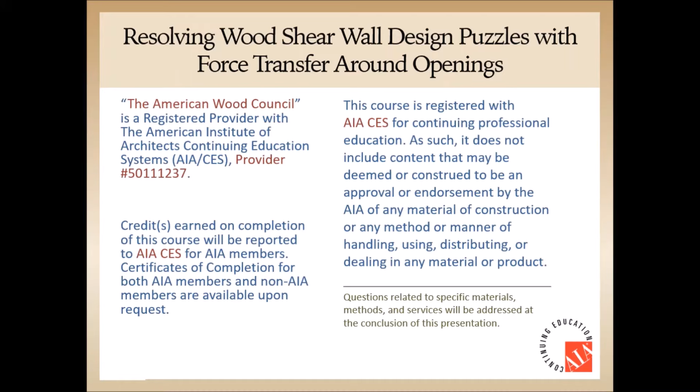To start with our learning objectives, first we'll look at the past and current methods for determining force transfer around openings using wood shear walls. Since force transfer around openings is accepted in code as the only method based on a rational analysis, there's a variety of methodologies available that engineers use regularly. Next, we'll look at the effects of different sizes of openings and full height piers, the different code allowable height to width ratios or aspect ratios.

And how that impacts all three currently accepted lateral design methodologies. We'll look a little more in depth into how the aforementioned testing allowed us to analyze the internal forces of the modeled shear walls and how that led to the accuracy comparisons between calculated and tested values for force transfer around opening methods. And lastly, we'll focus more so on the testing results that allowed for the creation of the new design methodologies and how they will allow us to accurately design for multiple openings and asymmetric piers as we move forward.

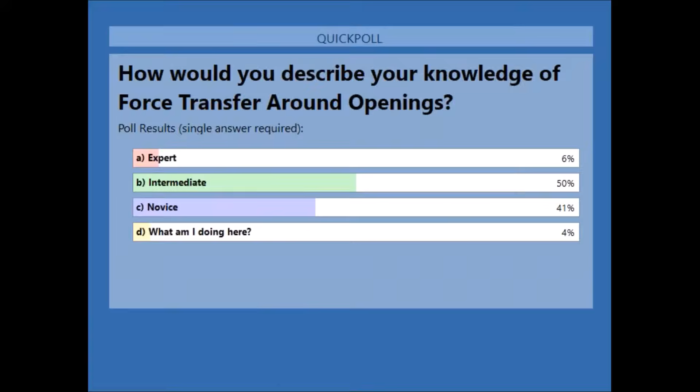So looking at this, here's our agenda for achieving the aforementioned learning objectives for the seminar. We're going to look at shear wall design challenges. We're going to look at the history of force transfer around openings research. We're going to look into the advancements in the force transfer around openings research, including asymmetric piers or piers of different widths, multiple openings in a wall line, C-shaped panels we will touch on, deflection calculations, and then the conceptual keys that came out of the testing that we did for FTAO. And lastly, some of the benefits that FTAO and continuously sheathed wood structural panels have for your shear wall systems.

So as structures are becoming more complex in the growing economy, designers are often searching for better options to accommodate the structural design.

One of the most challenging aspects of this design is the lateral resisting system. We're consistently seeing larger buildings, larger openings, which usually translate into reduced locations for lateral resistance, making it harder and harder to stay within the 2-to-1 aspect ratio of our shear walls.

What we'll examine here today is how FTAO will allow us to solve these puzzles by utilizing more of the accessible wall framing to aid in the resistance of these lateral loads.

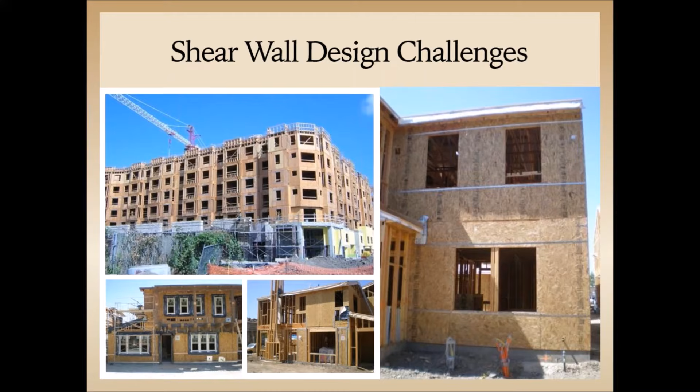But there are many ways in which force transfer can help us in the residential industry as well. Accommodating larger openings is shown in the bottom left, potentially replacing some of the pre-engineered systems by allowing for narrower segments, and allowing for openings that are not stacked floor to floor or that have some restrictions in other applications.

So before we focus on force transfer, let's look at our full spectrum of shear wall choices per the Special Design Provisions for Wind and Seismic, or SDPWS, which is part of AWC's National Design Specification. In SDPWS 4.3.5, it defines the different shear wall options.

You can do a segmented approach, a perforated approach, or force transfer around openings. We'll compare and contrast these to begin, especially for those of you who do not do wood design as regularly. So we'll begin with the segmented shear wall, as shown on the far left.

Your aspect ratio in the past was 2-to-1 for a seismic controlled design without a penalty, up to a 3.5-to-1 ratio with a reduction. Well, the code change for 2015 made it so that you have to apply this aspect ratio to buildings nationwide, regardless if it's high seismic or high wind. We will go into this in greater detail in our examples a bit later.

For the segmented wall, what you notice if you look closely at this picture is underneath these openings, we have open studs. So for this design, they most likely used a segmented approach, as they have the stacked wall systems with nothing going on in between the shear wall resisting.

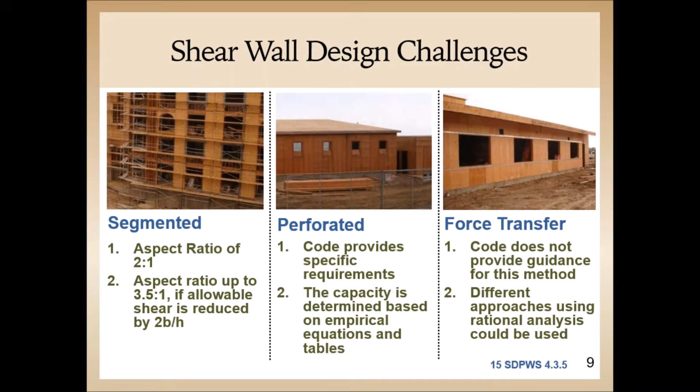So it's important to note that even though we are focusing on FTAO today, you don't have to pick one type of shear wall for your entire structure. You can mix and match story to story, wall line to wall line, whatever you need to do to get the best fit for your project.

So starting out, as I said, we'll do a little review. As shown before in the comparison, for the segmented approach, you only use the full height segments. So only these full height segments can apply to the effective lateral resistance. The aspect ratios are typically height to width ratios using only these full height segments.

Typically with a segmented approach, we also have to place hold downs at each side of every wall pier in order to resist our tension and compression forces.

Another item to note is that the aspect ratio adjustment has changed. The requirement for the adjustment penalty used to only apply to high seismic areas. Now, in the 2015 SDPWS, if you exceed a 2-to-1 aspect ratio, an adjustment is applied globally for all shear walls, regardless of seismic or wind. It no longer matters if you're designing in LA or Boise, Idaho. If you exceed that 2-to-1 aspect ratio, your shear wall has to have an adjustment factor, and you can go up to a 3.5-to-1 adjustment maximum. The adjustment factor now also has options, which we'll cover later.

So going to the perforated approach, we're looking at this as a single shear wall, so you only have 2 hold downs now at the outside of the shear wall. Your Vmax, shown at the bottom of the wall, is calculated based on the unit shear, based on the sum of the full height sections. We're still looking at the full height sections of the wall for our aspect ratios, so that's another challenge with the perforated shear wall. It's measured the same as the segmented approach. Your height is based on the total height of the wall, and in this case only the full height segment widths adjacent to the openings count for your height to width ratios.

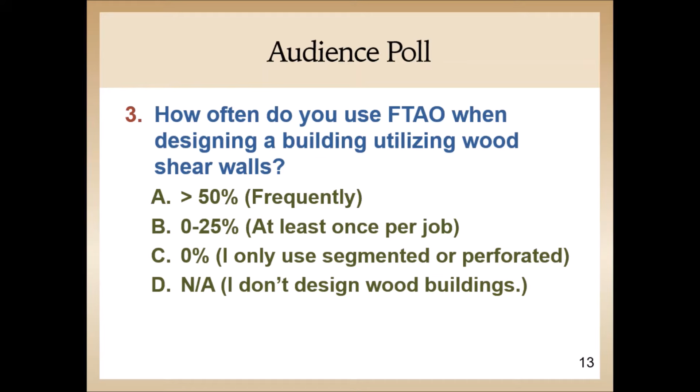All right, so how often do you use force transfer around openings when designing a building utilizing wood shear walls? Is that more than 50%, frequently; 0 to 25%, at least once per job; or 0%, you only use segmented or perforated, or you don't design wood buildings.

Again, 75% of you have voted in the first 20 seconds. You all are very fast. All right, I'm going to go ahead and close it.

Let's see. So 41% do not use force transfer around openings, they only use segmented or perforated. 26% don't design wood buildings. 22% use it 0 to 25% or at least once per job, and 11% use it more than 50% or frequently. All right, Jared, back to you.

Okay. So here we want to look at the aspect ratio adjustment factor changes that I noted before, and the deflection requirement changes for the new 2015 SDPWS.

As I noted, instead of applying that adjustment factor only for high seismic structures, now all shear walls with an aspect ratio greater than 2 to 1 but less than 3.5 to 1 shall apply a reduction factor. The old reduction factor was 2 times the actual width divided by the height. In section 4.3.4, there's a new aspect ratio factor equal to 1.25 minus 0.125 times the height divided by the width. So for the old factor, where aspect ratio was 3.5, the adjustment factor was 2 divided by 3.5, which equaled about 0.57, versus the new 1.25 minus 0.125 times 3.5, which gets us about 0.81. So we're looking at about half the penalty with the new aspect ratio adjustment.

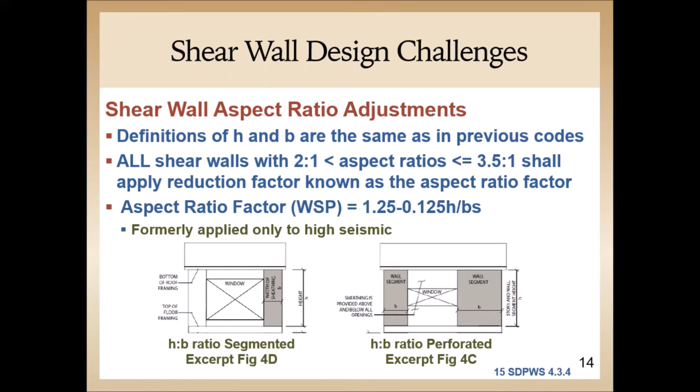The difference is, with the new aspect ratio adjustment, you also have to make sure that all of the shear walls in that line have identical deflection.

So you may or may not be aware of this in SDPWS section 4.3.3.4.1, which states that individual shear walls in a line shall provide the same calculated deflection. So that's what I was talking about.

Each design utilizing the new aspect ratio adjustment factor shown in 4.3.4 must also conform to this provision. This creates an additional step to using the less restrictive adjustment, as we now have to ensure that each wall segment used to resist shear loads in the same wall line has the same calculated deflection.

So as a note, you do not have to perform this check if you have shear walls using the historic adjustment factor, or shear walls that do not exceed that 2 to 1 aspect ratio.

So another clarification for the new 2015 SDPWS that's useful to note is with the perforated approach. In the past, the question would come up: if some of my walls meet the 2 to 1 aspect ratio in my perforated shear wall, but not all of them, do I need to apply the adjustment factor to the entire wall, or do I just apply that adjustment factor only to the full height segments?

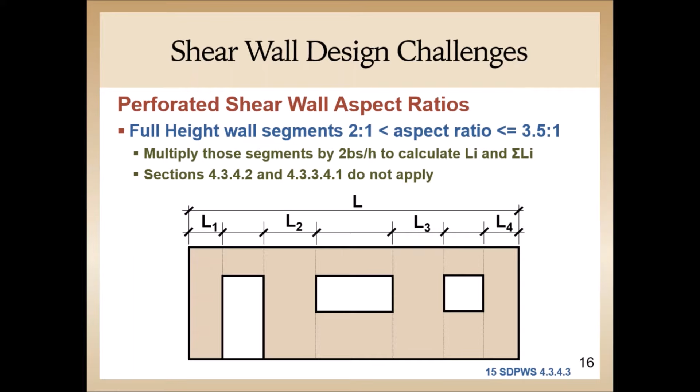And it's less of a penalty than in the past, but also you have to make sure, if you use the new aspect ratio adjustment factor, that all four of these shear walls have the same deflection across the wall line.

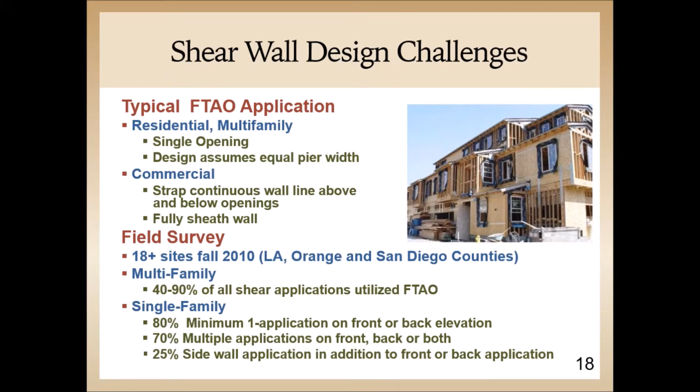They're typically in the front or the back of the house, right? So this makes sense as to why we saw the need for force transfer around openings that was going to be used on narrow segments with taller heights, and also ratios based on the number of openings, which drive us to the requirements for our FTAO.

So the joint research project was done with APA as well as the University of British Columbia and the USDA Forest Products Lab. The University of British Columbia provided a finite element analysis component to the project. They replicated the same testing that we did physically in our laboratory with a computer model to show the same results. The Forest Products Lab provided oversight and a managerial aspect.

The goal was to look at the variations in walls with different code allowable height to width ratios, the 2-to-1 versus the 3.5-to-1, different sizes of openings, different levels of detailing, and different wall panel widths.

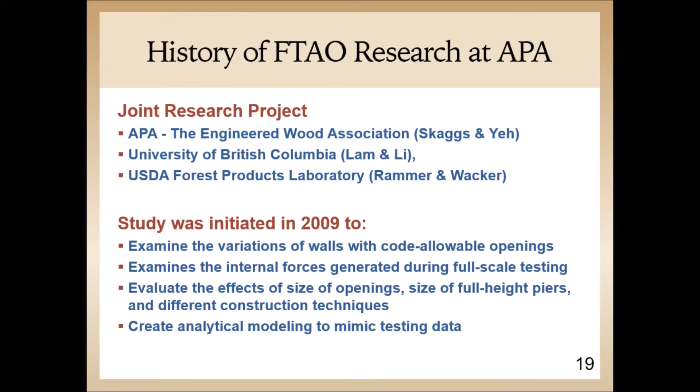Did they only sheathe the full height segments using a segmented approach, or did they sheathe the entire wall and not have the full hardware as a perforated wall versus full force transfer around openings with strapping and blocking above and below? We wanted to look at and compare all of the current design methodologies.

In addition to recognizing what was done in the field, we wanted to compare that to the rational analysis techniques typically used by structural engineers, to identify the most accurate rational analysis method. We wanted to see which current force transfer around opening techniques would calculate strap forces closest to those measured in the laboratory testing.

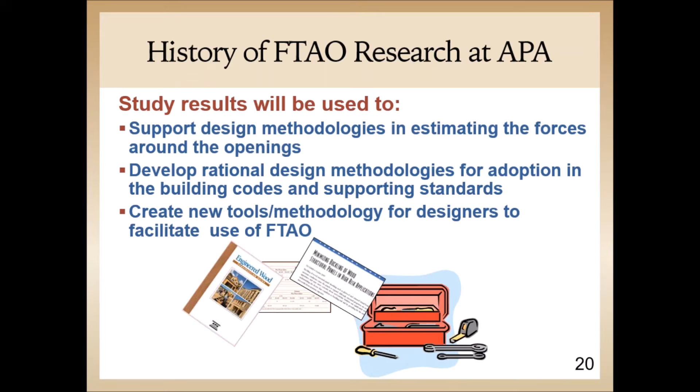Anytime APA does research or brings something into the laboratory, our goal is to make things better for the construction industry. We want to help engineers create accurate designs faster, help contractors build more efficiently, and make the entire process more efficient for all parties involved.

So to start off, we wanted to look at all the different techniques currently available for force transfer around openings. When we talked to designers and went out into the field, we identified the top three most common force transfer around opening techniques currently being used.

For the cantilever beam analogy, you take the same wall, but now we break the wall into segments and sum our moments to solve for the forces at the corners.

Thinking about the moment we calculate based on the geometry, and applying this to a typical wall: where do we tend to have more sheathing, above our opening or below it? Typically we have more sheathing below the opening. So when calculating moments and summing for corner forces, we tend to calculate a greater force above our openings, where we have less of a resisting arm.

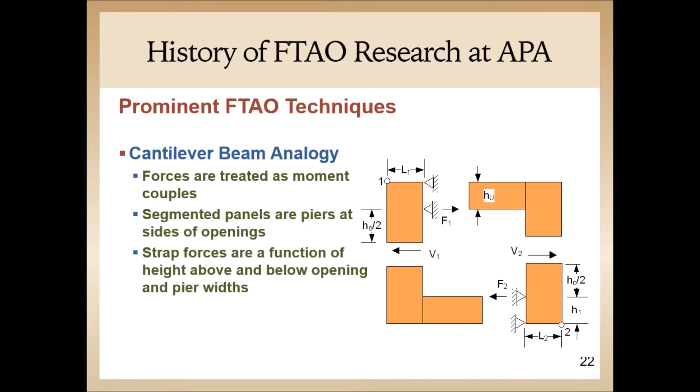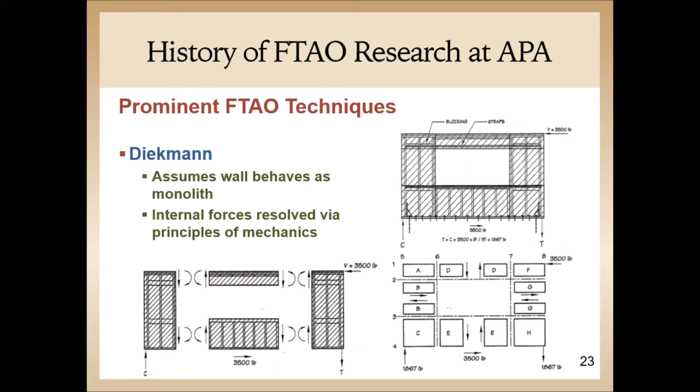The most common technique is the Diekmann technique. This solves for the internal forces of the wall using principles of mechanics. We break the wall into smaller individual segments, and using simple statics, solve for the forces in each segment. Once resolved, we put all the pieces back together to calculate the overall forces on the wall system. Some of you may also be familiar with the Thompson or SEAOC method, which is similar but yields slightly different results.

That brings us to our next audience poll question: in which force transfer around opening method are the forces determined by calculating moment couples? Is it the drag strut analogy, cantilever beam analogy, Diekmann-Thompson, or the unicorn method?

I think the questions are getting a little harder. People are going a little slower. Maybe we're getting tired—it's that time of afternoon.

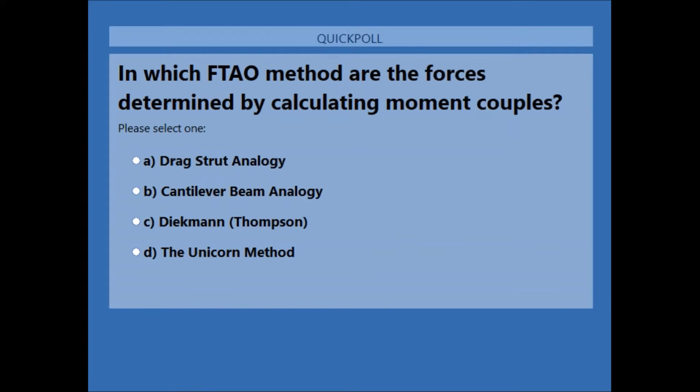I've got about 35 seconds left, and we're at 80% response. So we've got 58% saying the cantilever beam analogy, 27% the Diekmann-Thompson, 14% drag strut analogy, and 1% the unicorn method. All right, Jared, what's the real answer?

The correct answer is B, the cantilever beam analogy method. This is the one where we resolve the forces by moments and see how that equates into the strap forces above and below the openings.

Moving forward, let's apply this to a simple wall example to see the resulting forces between the three methods—we'll get into a full example shortly. For this wall we have a 2,000 pound shear force at the top, a 2'3" width for the first wall pier, a 4-foot opening, and a 4-foot end wall pier, giving us asymmetric wall piers, with 2 feet of sheathing top and bottom. This is asymmetric wall piers with unrealistically the same height of sheathing above and below the opening, but just for quick reference purposes.

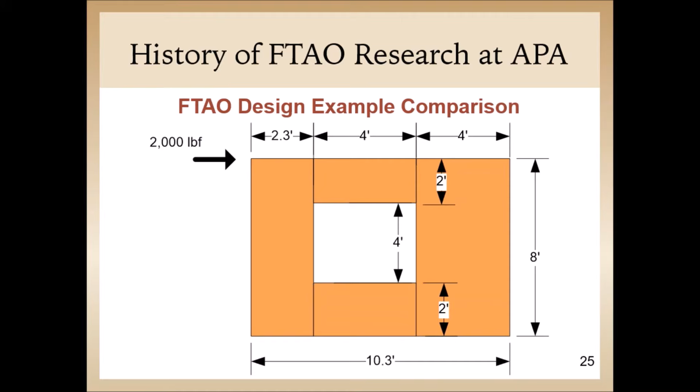So overall length of the wall is going to be 10 foot 3 inches, and the wall height is 8 feet. So running the analysis for all three of the FTAO methods on my program TI-89 to evaluate the corner forces at the openings.

We find that the drag strut analogy yields forces of 284 to 493 pounds. The cantilever beam analogy resulted in 1,460 to 2,540 pounds. And the Diekmann method, 567 to 986 pounds.

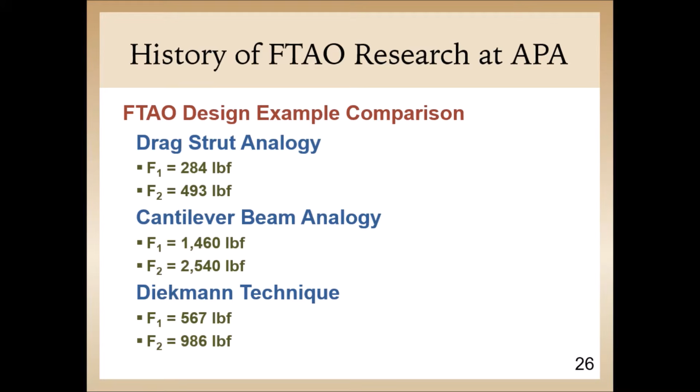So looking at the numbers, we see quite a bit of spread between the results, which could also alter the strap selection for the wall. So the questions are: are they all correct? Are they all incorrect? Which method should we be using? And those are the questions that we set out to answer with our testing.

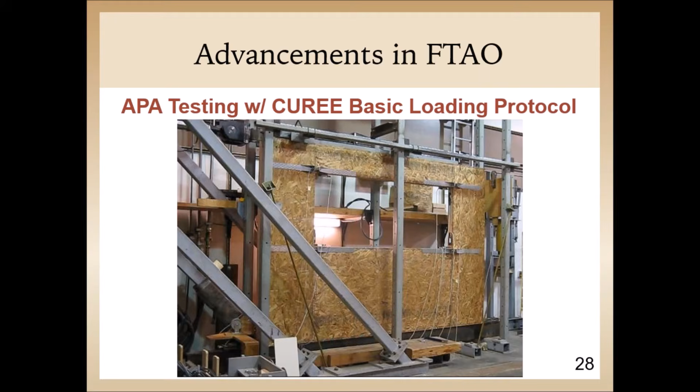The flat straps are going to be used in the field, and these hold downs were specifically used for the ease of replication in the testing and monitoring, and it also allowed us to attach more monitors to the hold downs than we could with a flat strap. We did additional testing, which I can show you in a little bit, with a wall that has the flat straps to prove that we were going to achieve the same results and that the hold downs did not alter our methods. So I wanted to point this out before getting too far along so everybody wasn't thinking we were crazy and going for something completely different. But if you decide to use those hold downs in the future, it is tested and completely approved, so that's up to you.

So all the walls were built 12 feet long, 8 feet tall, and we had 12 different wall configurations that were tested, some with force transfer around openings and some without. The wall nailing was 10D common nails at 2 inches on center for all of the walls, and we used 15/32 performance category Structural 1 OSB.

You may also be asking yourselves, why did we select these particular materials consistently? The reason why, if you're familiar with the history of the perforated wall tested in Japan that we spoke about earlier, you'll recall there was a limitation to the maximum shear you used to be able to use in the past, based on the testing they did for perforated shear walls—they had only tested it to that level of shear capacity. So we didn't want our research to be limited based on selecting a lower level of OSB, nailing, or whatever component. So we took it to the top of the chart, using the Structural 1, 15/32 OSB, and the 10D nailing. We also chose OSB versus plywood because there are some people in the industry who believe plywood is a superior product to OSB.

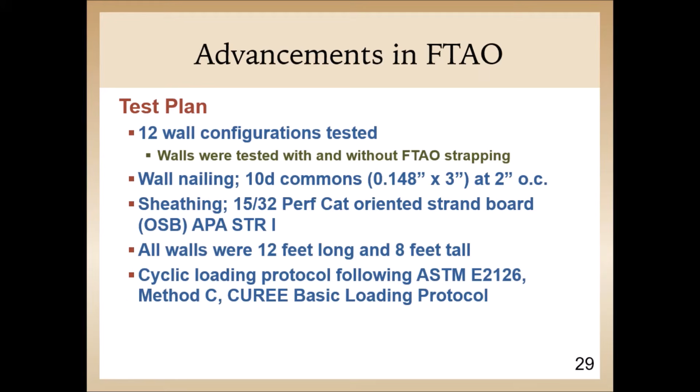All of the walls were tested using a cyclical loading pattern and the CUREE basic loading protocol. As I go through our wall configurations, I'd like to highlight just a few of these. I'll touch on all of them, but if you're interested in reviewing any configuration in more detail, the full research report is available on our website.

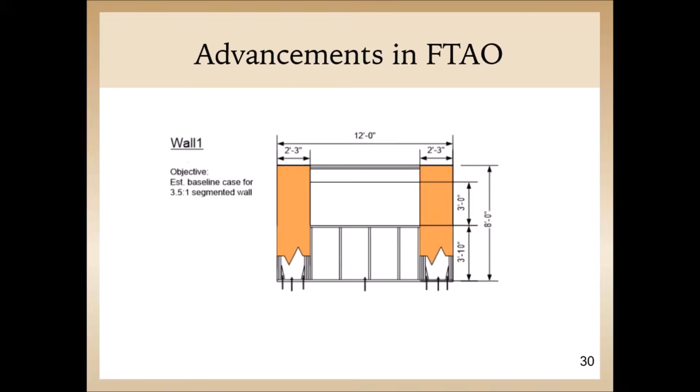Beginning on wall 1, we were looking at the segmented approach. You see we have our 3.5 to 1 aspect ratio for our wall, so we end up with 2'3" pier lengths on either side. There was no sheathing above or below the openings—sheathing only for the full height segments, with hold downs at either end.

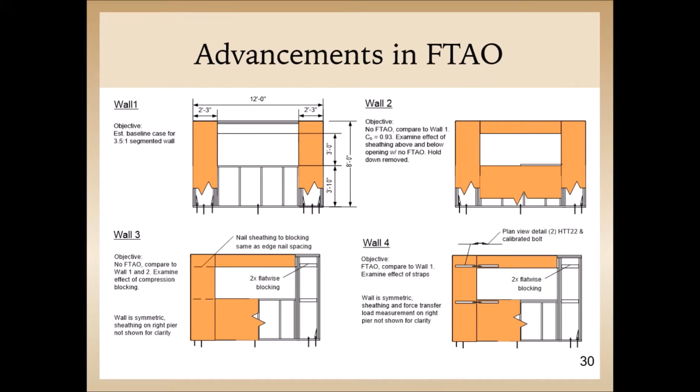Wall 2: we added sheathing above and below the opening and removed the interior hold downs, enacting the perforated method. Wall 3 is the same as wall 2 with the addition of blocking at the interior side.

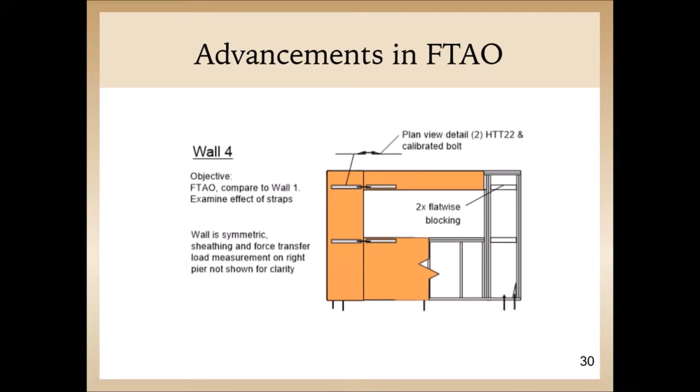If we look at wall 4, we're building up to that full force transfer around opening detailing. It's the same geometry as walls 1 through 3, but now in addition to the sheathing above and below the openings, we have strapping at the exterior of the wall and nailing as appropriate.

Now if we move on to walls 5 through 8: for wall 5, we've taken wall 4 and increased the size of the opening.

We'll blow up wall 6. It's also similar to wall 4, but if you look closely you'll notice the C-shaped panel at the left side of this diagram. Typical wood structural panels are usually 4 feet by either 8 or 10 feet long on a job site, so for this wall we had the 2'3" piers at either end. Part of what we saw a lot of in the field study was the fact that these openings were being cut out of the panels in place, creating these C-shaped areas of sheathing. Seeing this, we wanted to see how, or if, this would react during testing—whether having that C-shaped panel contributed to the force transfer around openings and if the panel helped transfer the load. I'm not going to spoil the results now; we'll go over this in a bit.

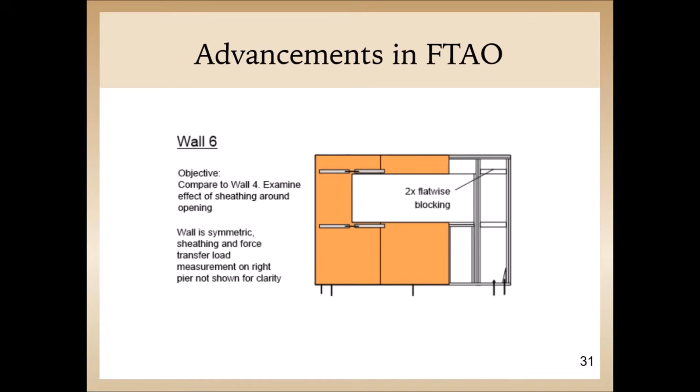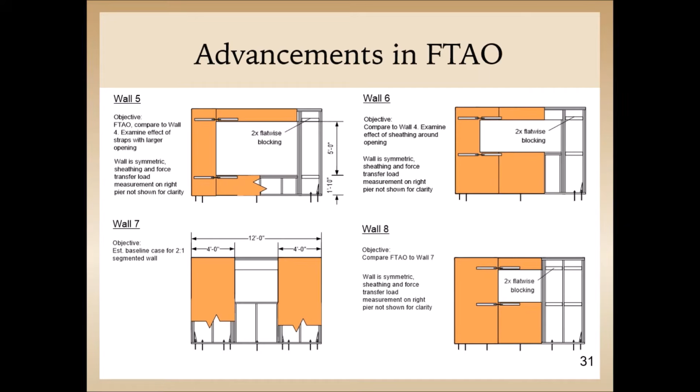Looking at walls 7 and 8: wall 7 is similar to wall 1, but we are getting our basis for the 2 to 1 aspect ratio in lieu of the 3.5 to 1 aspect ratio. Wall 8 is wall 7 with full force transfer around openings detailing.

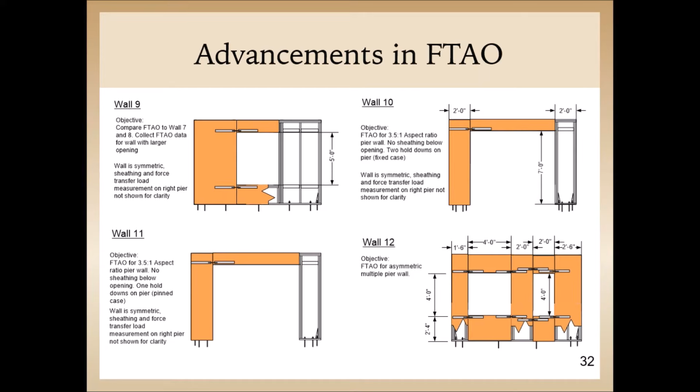Looking quickly at walls 9 through 11: wall 9 is basically the same as walls 7 and 8 that I just showed you, but we have enlarged the opening once again to analyze the effects on the strapping. Wall 10, we wanted to analyze a larger door opening using FTAO. Wall 11 is the same as wall 10, but if you notice at the bottom, we've removed the interior hold downs from each pier.

So again, we'll blow up wall 12. This is our last segment configuration, and it provided us with some of our greatest information as far as going around multiple openings and asymmetric piers. You'll notice we have different pier lengths for each of the full height segments. We have the full force transfer around openings detailing, one hold down at each end of the shear wall, strapping above and below the opening, and—though you can't see it—there's blocking on the reverse side of the strapping at the interior side of the wall.

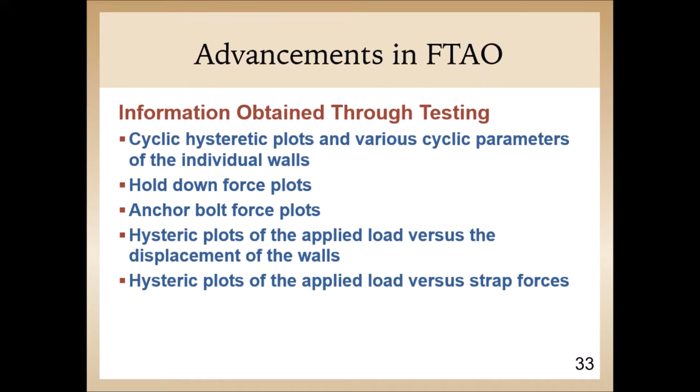So through all of this, what information was obtained? We monitored different aspects of the building, from anchor bolt forces to hold down forces to strap forces, and wanted to collect all this information. We evaluated the displacement of the elements versus the load applied and provided hysteretic plots for all of this information—we'll see some of this in a bit. We used a reference deformation of 2.4 inches, allowing a maximum of 4.8 inches on the wall system as a whole. This reference was simply based on some of our historic testing and conclusions we've drawn from shear wall testing throughout the years.

So the strap forces were measured during testing to gain a comparison between the common FTAO techniques being used today. As we discussed earlier, we have the drag strut technique, the cantilever beam technique, Dieckmann technique, and the SEAOC-Thompson technique at the end. So we used the test to compare the measured strap forces versus the forces estimated using all these different calculation techniques.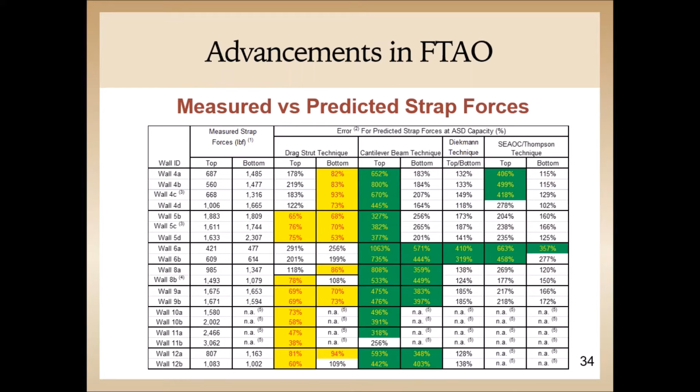All the other techniques were considered way overestimated on that wall. So the C-shaped panel really does provide us some design assistance and something to consider moving forward if you plan to use the drag strut technique. You can incorporate the C-shaped panel into your detailing to help offset some of the unconservative nature of the design. We currently don't have anything in place to help with that design right now, but using the rational analysis, you can help use that to move forward.

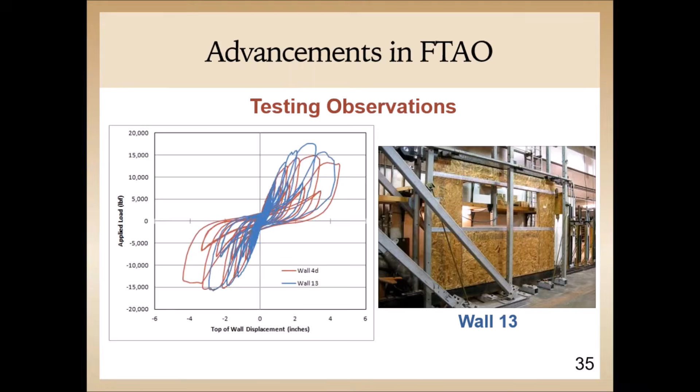As mentioned before, here's a photo showing the flat strapping that was also done in the lab. This is wall 13. The only purpose of this wall was to prove that we were going to get the same relative forces as we were with the hold downs used on some of the other wall systems. The strapping we used in the lab were 2 traditional hold downs mounted seat to seat on the other walls, so here we did that for the strapping and flat straps all the way across the wall system. On the left-hand side, you can see one of the hysteretic plots that was produced from applying that lateral load to the system and regulating that through the computer-generated graphics.

So our conclusions, looking at these 12 wall configurations and the different levels of detailing we used, we did find that the walls detailed with full force transfer around opening resulted in a better global response. The stiffness of the wall increased, as well as the strength of the walls, on all of the force transfer around opening configurations in comparison to all of the other approaches. So that's why we want to focus around force transfer around openings.

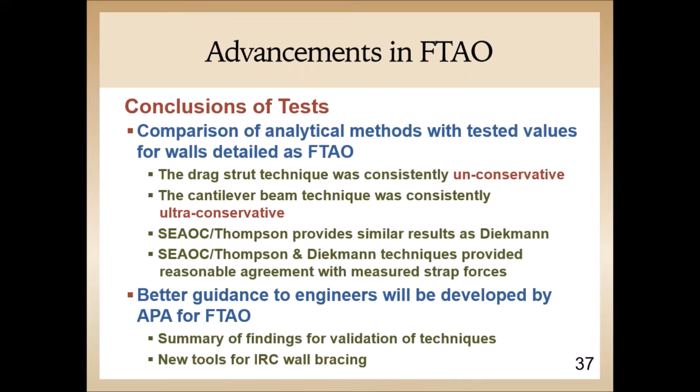When looking at your rational analysis methods, however, we also recognize that the drag strut technique was consistently unconservative. The cantilever beam was typically ultra conservative, which left us to decide whether to use the SEAOC or the Dieckmann method as part of our design focus. These two were the most economical design choices. So getting through that, that leads us to our 6th audience poll.

And much like the other one, same format, a little different question. Which force transfer around openings method tested was found to be consistently unconservative? Is that the drag strut analogy, cantilever beam analogy, Dieckmann-Thompson, or the unicorn method?

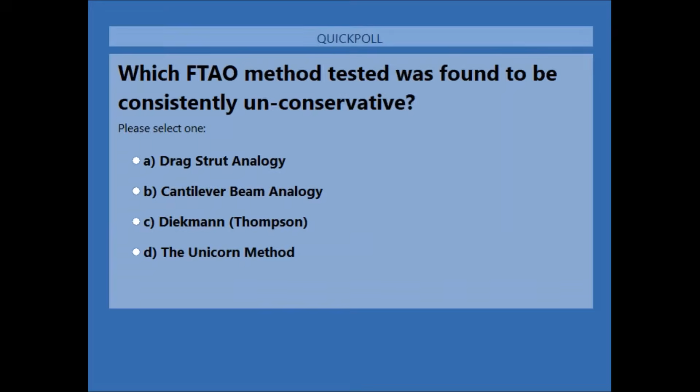I think people were probably listening. So we've got 78%, 79, 80, and I'm going to close it. We've got 87% saying the drag strut analogy, 6% cantilever, 5% Dieckmann-Thompson, and 2% unicorn.

It's always good to have fun. Okay, Jared, there we go.

Correct answer is A, the drag strut analogy. Hopefully this is a bit of a softball - that was the consistently unconservative version.

So what's next? What else can we do to move forward with FTAO? Most of our feedback from engineers time and time again was on something similar to the wall 12 configuration - multiple openings and asymmetrical piers.

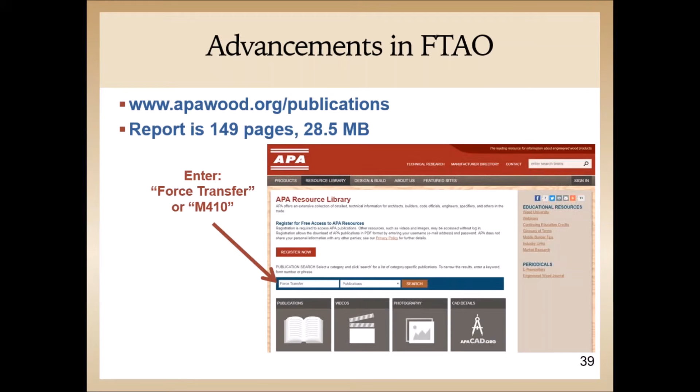Before I move to our advancements, a note: if you're wanting more information, the research report is available on our website at apawood.org under the resource library. Simply search for force transfer or the form number M410, and you can download our research and this documentation for free. This also brings me to the SEAOC paper shown here.

In 2015, Tom Skaggs, one of our research engineers in Tacoma, Washington, and Karyn Beebe, another field service representative similar to myself, wrote a paper for the Structural Engineers Association of California convention titled Advancements in Force Transfer Around Openings for Wood Frame Shear Walls.

This really focuses on the configuration of wall 12 that I just showed you all - multiple openings and asymmetric piers. It is also the basis of our upcoming document that we're trying to put out.

It's currently in development today along with a spreadsheet, and the report is on schedule to be released hopefully by the end of this year. It will be accompanied by that Excel spreadsheet that hopefully will help make this an easier transition in using force transfer around openings. Both of these were developed along with our testing that was done in the laboratory.

So here are a couple snapshots from the Wood Design Focus articles that I mentioned before with Zeno Martin. This really shed light on the different analysis techniques, giving very different answers. Also, as mentioned, Ed Diekmann wrote back to Zeno in his original article with his own rational analysis approach.

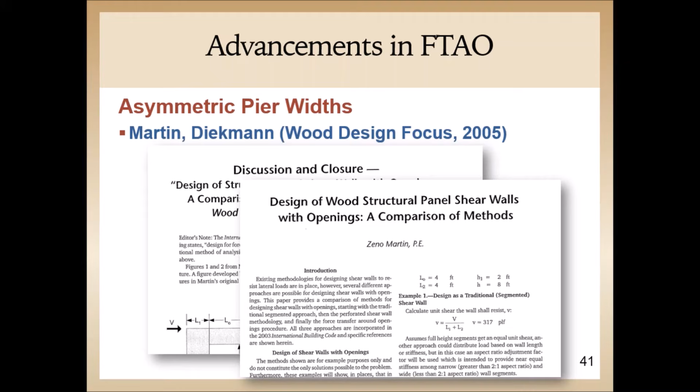Mr. Diekmann was also very kind when we did our first phase of testing, as shown in the laboratory. He provided us with design results for this same wall number 12 so that we were able to use his actual calculations in our comparisons.

So now that we're at wall 12, looking closer at this wall system, this is the full force transfer around openings detailing. We have sheathing above and below all of the openings. You only have a hold down at the beginning and at the end of the wall, and strapping is provided above and below the openings.

Again, you cannot see it, but blocking is provided on the interior side of the wall. We have multiple openings, 2 windows here, asymmetric piers, different pier widths for the entire wall line. So how do we provide an accurate analysis for this? That's what we wanted to set out to prove.

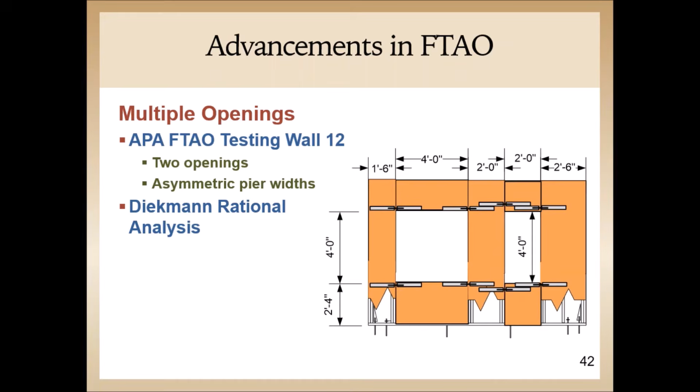So comparing the Diekmann technique to the SEAOC technique, there's some different basic assumptions. We're focusing on the Diekmann technique for this presentation - that's also what we focused on for our conceptual keys and what came up out of the testing for FTAO. Not to say you can't use another technique, but using this method matched the testing most accurately in all of the forces.

So the first assumption in our conceptual keys is that the unit shear above and below the opening is equivalent. The second is that the corner forces are based on the shear above and below the openings and only the piers adjacent to that unique opening.

So in the previous slide, we had 2 openings, and when you're looking at this distribution of forces, you're going to break it down into each opening one at a time before you put it all back together. The tributary length of the opening needs to be calculated to define how much shear goes into each pier.

So in the Diekmann technique, you're not going to have the same shear horizontally for your full height segments. That's going to vary - it's going to be the same top and bottom, but not the same horizontally. So you need to identify the tributary length that applies over that opening to each of your full height pier segments, based on the geometry of the panel lengths next to each unique opening.

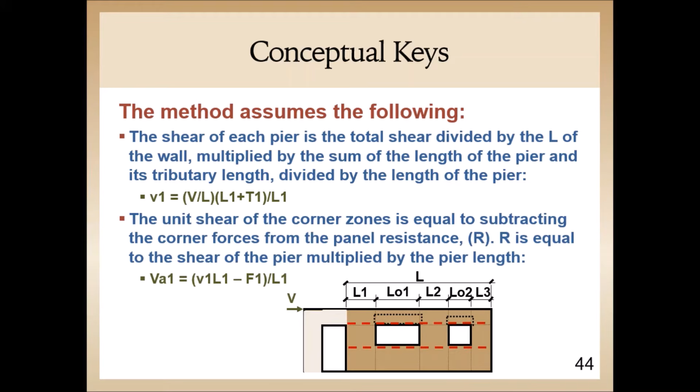So the next step is that you have to be able to calculate the shear in all segments of the wall. We have those corner zones that have to be calculated, based on the resistance minus the strap forces, and then we divide that again by the length of the pier.

So we'll go through a design example so we can see this in a little bit more detail here in a bit. As I mentioned earlier, the best part is the final conceptual key. The final key is that when you're done summing all of the shears for the segments, you can check your work.

The first vertical line and the last vertical line, shown here as lines 1 and 6, should sum to equal the hold down forces. All of the vertical lines in between should sum to zero. This lets you know if you've done your math correctly, and you can check all of this at the end of the calculation.

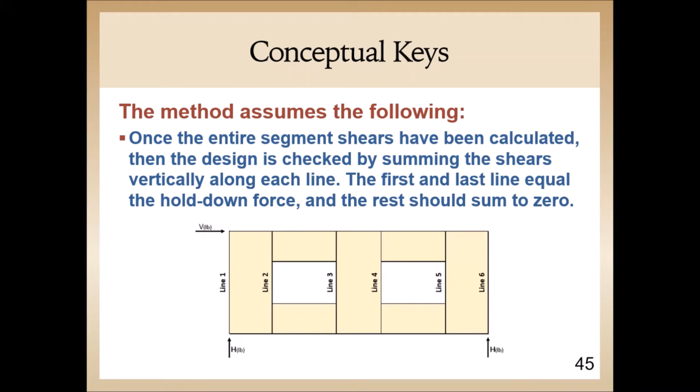This is a lot of keys, and I know I've gone through them a little quickly, so we'll go through an example here in a bit to reinforce it and kind of show you what I'm discussing.

So this brings us actually to our next audience poll before we get into our design example.

Okay, so which lateral design method do you believe is the most economical? Segmented, perforated, FTAO or force transfer around opening, or duct tape? I'm pretty sure it's duct tape. Yep.

All right, we've almost got 80%. And here we go.

All right, so we've got 71% say force transfer around openings, 18% say perforated, 8% segmented, and 3% are with me around duct tape. Nice.

So, and all right. What do you say, Jared? What is it? That one, there's no right, no wrong answer, right? So it's what you perceive and how you feel in your design.

So what we're looking to prove, obviously, with our presentation and our testing is that force transfer is hopefully going to be the most economical choice. So as we get into this, we can look at that in a little bit more detail.

As most of us are engineers, building officials, and so on, some of this is going to be a review. But as I stated in the testing, we wanted to make sure that we looked at identical wall patterns and all of the methods that are currently available to us to see which one was the most economical, which one was the most accurate, and which one helped with our designs.

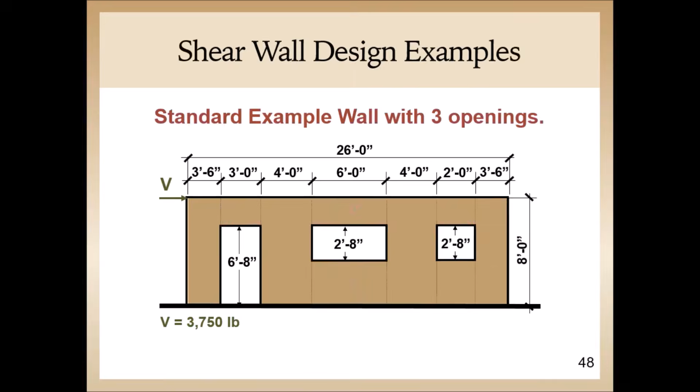So we have 2 4-foot piers at the interior walls and 2 3'6" piers, one at each end of the wall. We're going to be applying a 3,750 pound seismic shear load to this wall system.

So beginning with the segmented approach, we ignore the contribution of the sheathing above and below the windows, correct?

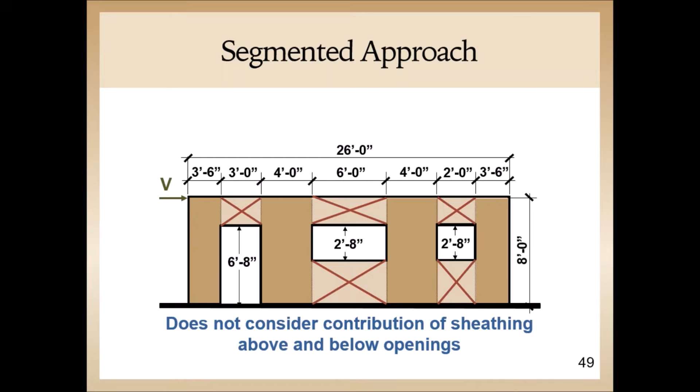First, we'll look at the height to width ratios of the segments. We recognize that we have the 4-foot wall segments that meet our 2-to-1 aspect ratio, and the 3 foot 6 inch ones do not. They have to take that adjustment factor.

What we're showing here is the historic adjustment factor: 2 times the width of the pier divided by the height. For our 3 foot 6 inch segments, we would have to adjust only these segments by that 0.875 shown at the bottom right-hand corner. This is an option - you could use the new adjustment factor we spoke about previously, but then you would also have to perform that additional step of calculating the deflections of each pier to verify that it is the same for all piers. So for simplicity, for this example and presentation, we're only going to show the historic adjustment factor.

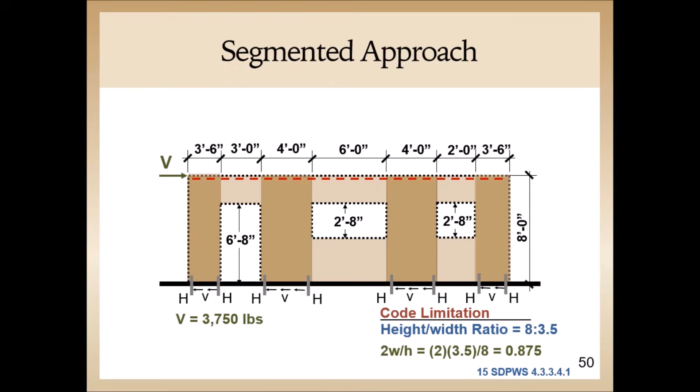So first, we start by calculating our unit shear. This is the 3,750 pound shear load divided by the sum of the length of the full height pier segments. So we add 15 feet total, which gives us 250 pounds per linear foot along the wall.

Now we look at the allowable shear for our segments based on the sheathing values. If we look at the narrower 3 foot 6 inch shear walls, we're using 15/32 rated sheathing, 8 penny common nails, 4 inches on center, and we have to apply that 0.875 adjustment factor to the 380 PLF, which brings us to 332 PLF. These values are out of the SDPWS table 4.3a, nominal unit shear capacities for wood frame shear walls.

As I spoke about earlier, we're using a seismic load, so if you want to double check some of these numbers, you can feel free to do so. This will yield that 332 PLF, which exceeds our 250 PLF design value, so we're good there.

So now we're looking at the 4 foot wide walls. We're using the same thickness of sheathing, the same nail size, but the nailing can be reduced to 6 inches on center instead of 4 inches on center. Getting the shear value from our table, we show that our allowable shear exceeds the design shear, so we're good.

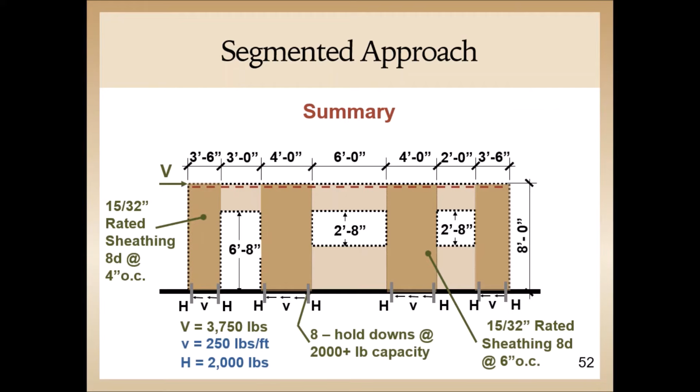So quickly, we'll look at the summary for the segmented approach, and we'll review this again in a bit when we compare all 3. We're going to have 15/32 rated sheathing with 8d nails at 4 inches on center at the outside 3 foot 6 inch walls, 15/32 rated sheathing with 8d nails at 6 inches on center at the interior walls, and we're showing 8 hold downs with a 2,000 pound plus capacity. And then our attachment at the base of the wall has to also equal the 250 pounds per foot, right?

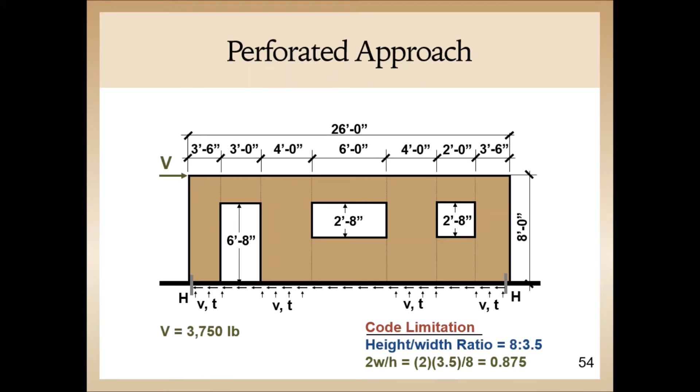So now let's look at that same exact wall using the perforated shear wall method. Looking at our aspect ratios, we have the exact same values as we did with our segmented approach. The 4 foot walls meet our 2-to-1 ratio, but our 3 foot 6 inch walls must still be adjusted, right? So we have that same factor at that wall.

We'll start out again by calculating our unit shear. This is the 3,750 pound shear load divided by the sum of the length of the full height pier segments. Again, same wall, so 15 feet total, which gives us that 250 pounds per linear foot.

Now we need to take a look at the percentage of the length of the full height sheathing versus the entire length of the wall. Taking our 15 feet, dividing that by the 26 feet, we come up with a value of around 57%. Now we get our maximum opening height, which no brainer is our door, correct? So 6 foot 8 inches tall.

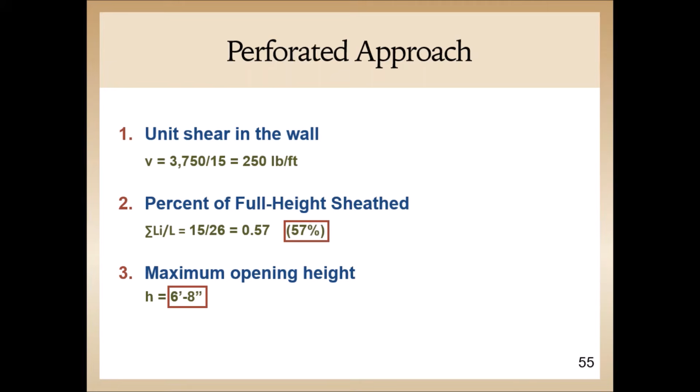And this is where we go in and we find our shear capacity adjustment factor, or that Co factor, that we need to use to adjust the value of the shear. So taking into account a percent of full-height sheathing and maximum opening height, we take that 57% that we just calculated, find our 6 foot 8 on the top, and interpolating between the values we end up getting that 0.61.

Also, if you're still not completely sure about your opening height and want some flexibility, you can look at the top of the chart here and see that the opening heights are also given in a ratio, so you can find out what your wall is capable of and design your opening heights based on that, without having to know your design heights going into the chart. So we come up with this capacity factor of the 0.61.

So now that we have our CO factor from the table, we use that to adjust the allowable shear value of our sheathing. Going back to the SDPWS table 4.3a and looking at the 15/32 sheathing with 8D penny nails, we have to go to a 3-inch on center nail spacing in order to achieve our design value.

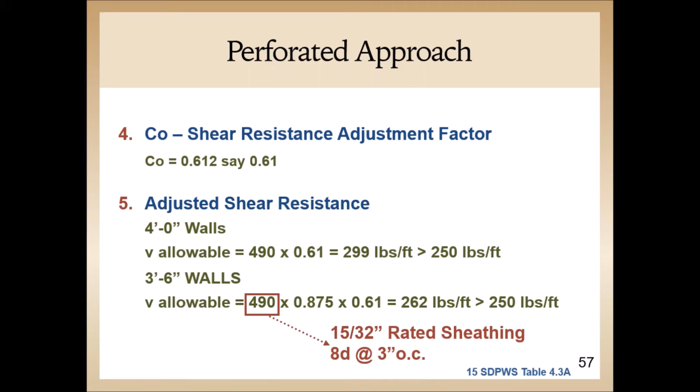So we took the 490 PLF allowable shear, multiplied that by the shear resistance adjustment for the 4-foot walls, and by both the aspect ratio adjustment factor and the shear resistance adjustment factor for the 3-foot 6-inch walls. For the 4-foot walls, we end up with 299 pounds per foot, which is greater than 250. For the 3-foot 6-inch walls, we actually have to go down to 262, which is still greater than 250. So we're good at 15/32 rated sheathing with 8D nails, 3 inches on center.

So stay with me, we're almost there. This perforated approach does take a little while.

Now that we have our sheathing determined, we can move on to calculating the uplift at the ends of the perforated shear wall, which is equal to our hold down force, R. This is defined as the unit shear multiplied by the wall height, so 250 times 8, divided by the shear resistance adjustment factor of 0.61. This gives us roughly 3,280 pounds.

Next, we calculate the in-plane shear anchorage, or Vmax, which needs our unit shear of 250 PLF divided by the shear resistance adjustment factor. This gives us roughly 410 pounds per linear foot, which is the value used to design our collectors, or drag struts, between full height wall segments at the top of the wall system.

Next, we have to take into account the uniform uplift anchorage value that will be used to design the minimum wall base plate attachment to the foundation. This is only used at full height wall segments and is equal to the in-plane shear force at the top of the wall, so that 410 PLF.

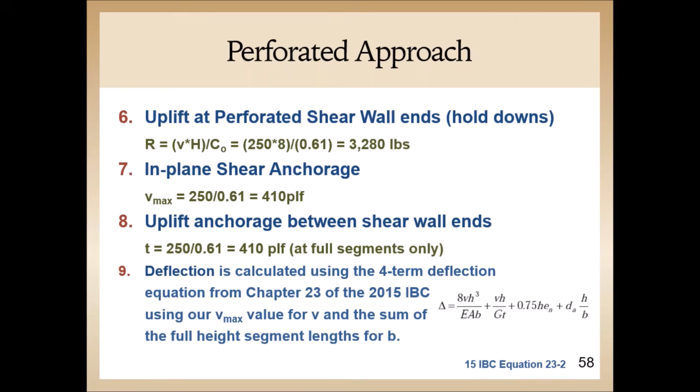Finally, looking at the deflection, we input our calculated Vmax and sum of length values into equation 23-2 of the 2015 IBC. For simplicity, I'm not going to go through the full deflection equations here, but we can definitely get that to you if you want it for the example after the presentation.

So looking at a quick summary, our aspect ratios have the exact same values as we did for the segmented approach. The 4-foot wall met the 2-to-1 ratio, so it did not have to be adjusted. The 3-foot 6 walls did have to be adjusted, but either way we came up with the same nailing throughout: 15/32 rated sheathing with 8D nails at 3 inches on center.

We only have 2 hold downs instead of the 8 on this one, so we have 3,280 pound hold downs. Our attachment at the base of the wall also has to be done for the 410 pounds per linear foot, which is higher than the 250 pounds per foot we had earlier.

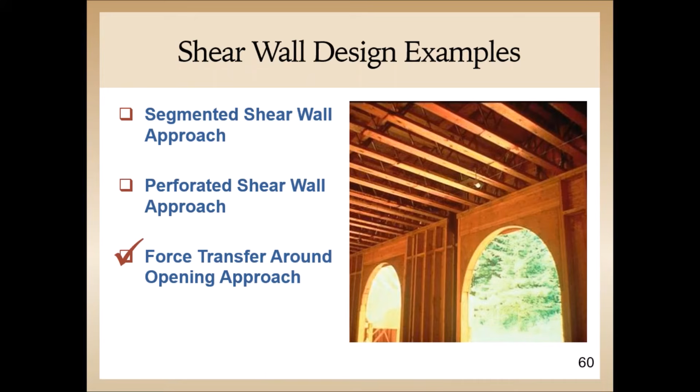Okay, we're there, we made it. Let's finally look at force transfer around openings.

So if we take the same wall geometry and apply the force transfer approach, we're going to begin our wall beyond the doorway. The reason for this is that first conceptual key, right? We're assuming an equal distribution of shear above and below our openings. So with the doorway, we cannot include it because we don't have any sheathing below the opening.

In this case, we're just going to start it at the location shown here. We check the height to width ratios using the height of our windows instead of the height of our walls, which is only 2 foot 8 inches, so we don't have to worry about taking any adjustments. We easily meet our 2-to-1 aspect ratios, and all of our walls are greater than 2 feet in width, so we're greater than the minimums required by code.

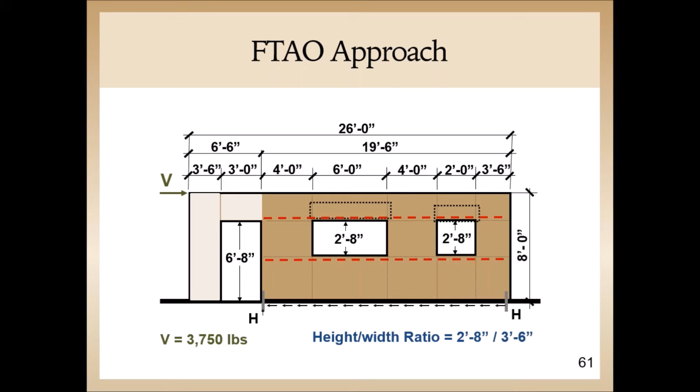We still have the same shear applied to the wall. So our next step is to calculate the hold down force, which is the 3,750 pound shear force at the top of the wall, multiplied by the wall height, and then divided by the length of the shear wall that we are incorporating, so the 19.5 feet.

In this case, our overall length is the full length of the shear wall, since we are counting on the sheathing below the openings to help us resist our shear load.

It also aids in the rigidity of the wall system, so this is another advantage to using force transfer around openings. When you calculate your hold down forces, in the other two methods, we were only able to use the sum of the lengths of the full height segments, but not in this case. We can use the entire length of the shear wall that we're initiating.

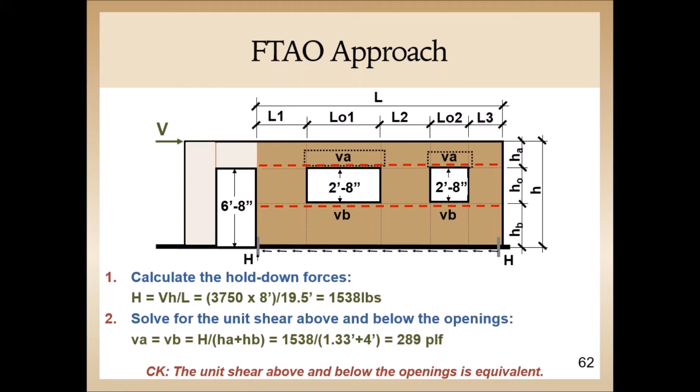So the second step is to then solve for the unit shear above and below the opening, essentially taking the hold down force of 1,538 pounds that we just calculated and dividing that by the sum of the heights above and below the opening, HA and HB shown here, which gives us our 289 pounds per linear foot above and below our openings, where those VA and VB are shown on the diagram.

Step number 3 is to find the total boundary force above and below the openings. To do this, we look at the openings individually. For our first opening, we take our unit shear that we just calculated, and we multiply that by the length of our first opening. So 289 pounds per linear foot multiplied by 6 feet, you get roughly 1,734 pounds. Our second opening is narrower, so we only have the 578 pounds.

So step 4, we're going to calculate the corner forces. We have 2 corner forces for each window, top and bottom as shown here. So on the wall system as a whole, we're going to have 4 corner forces for these openings. If we look at F1 and F2, you'll notice these are the same force because we have the same geometry for both of the adjacent wall piers. Both piers adjacent to this opening are 4 feet in length, and our calculated force is going to be 866 pounds for both, since they have the same tributary widths.

So if we look at F3 and F4, we're going to get different forces due to the fact that we have asymmetric piers on each side of this opening. The forces we calculate for F3 and F4 are as shown: 308 pounds for F3, 269 pounds for F4. So these are where we're going to get the forces that are required for our straps. We're looking at an 866 pound strap force.

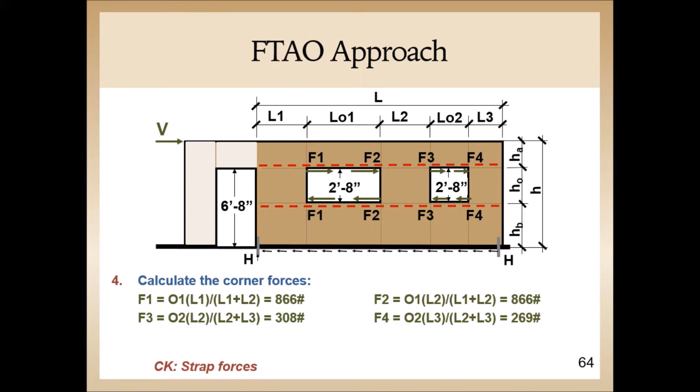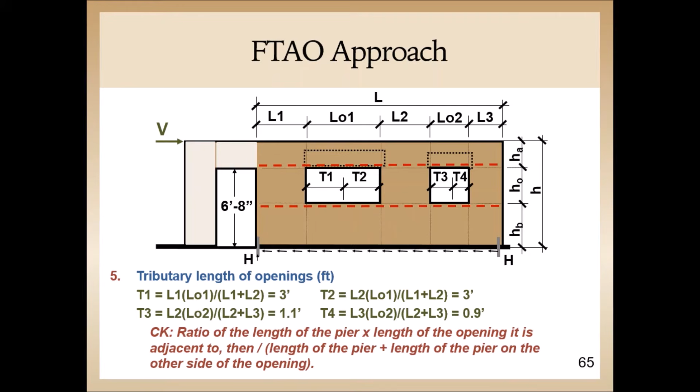Step 6, so these are all those conceptual keys and steps that I talked about earlier. Getting through this, we're almost there. Finally, calculate the unit shear beside the openings. Here we'll use the shear to the middle pier for an example. We need to take the sum of the tributary length T2 plus the length of pier 2 plus the tributary length T3 and divide that by our length L2.

By the overall length of the wall. So looking at V2, we take 3,750 pounds divided by our 19'6", which is the length of this wall system that we are utilizing, multiply that by the 3 plus 4 plus 1.1 that we just calculated, or the 8.1 feet, and divide that by 4 feet. So this gives us our 388 pounds per linear foot. And again, I can get you guys extended calculations on all of these if you want that at the end.

So just as a check, we can take the sum of our calculated shears multiplied by our pier lengths. V1 is 337 pounds times 4. V2, 388 times 4. V3, 244 times a 3'6". And this should all equal to the total shear at the top of the wall. So if we multiply all these out, we should get that maximum shear applied to the wall of 3,750 pounds. It does check out, so we're good to go.

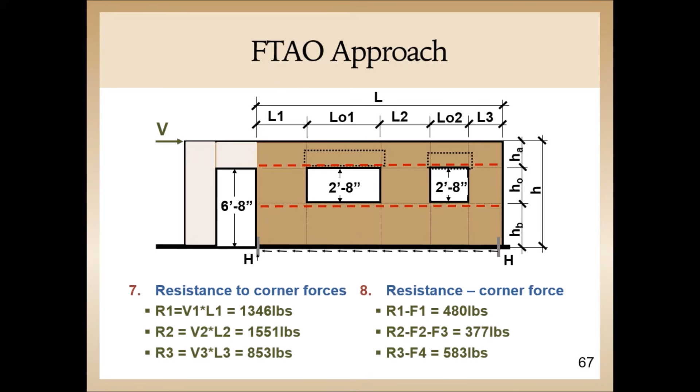Take the difference of each of those resistances from the strap force that we calculated earlier, then take that difference divided by the length, and it gives us our corner forces. So we're looking for these corner forces.

VA1, VA2, and VA3 are our forces above the opening, and then we have forces below the opening. Assuming that they are equal, our unit shears are going to equal 120 PLF for VA1, 94 PLF for VA2, and 167 PLF for VA3.

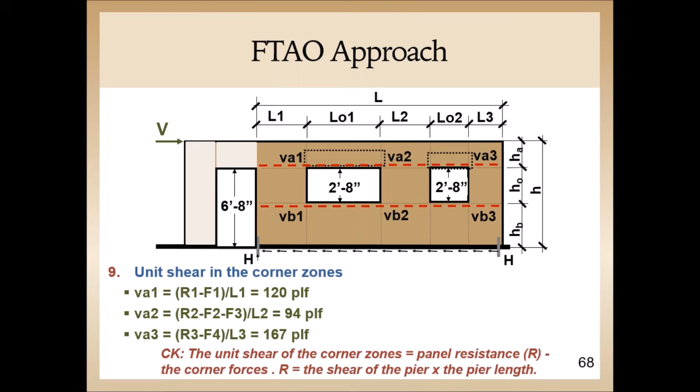That gets us to that final step, that final design conclusion, to make sure that we can calculate and sum all of the internal forces of the wall to 0, and all of the external forces on lines 1 and line 6 should equal our hold down forces. So not going through that here, we look at this last step, and being able to check all that work lets you know if you did your calculations correctly.

As I stated before, we are developing a spreadsheet to help with all of this, to help automate it, and I have design examples as well as documentation that can help you with the design steps if you want further instruction on these as well.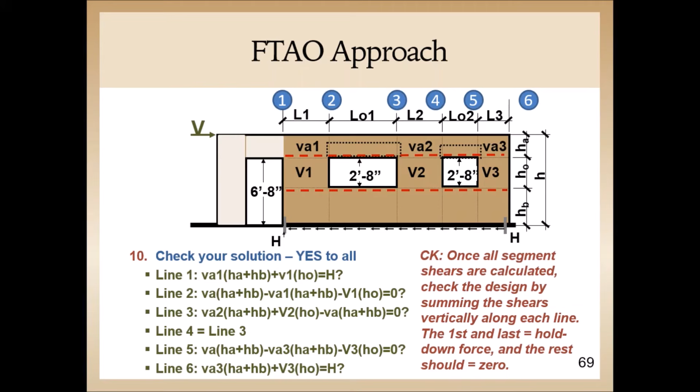We're considering this to be within our engineering judgment to allow for this wall system to work. We also only need 2 hold downs, similar to the perforated shear wall, on the outside. These are going to be equal to that 1,538 pound capacity or greater, okay? Our shear connection at the base of the wall is at 388.

So let's put this all together. Let's look at all 3 of our design assumptions side by side. If we compare all 3 of the methods we just went through, we can see some similarities, but FTAO appears to have the greatest benefits, in my opinion.

All 3 used 8D nails and 15/32 sheathing, with force transfer around openings and segmented using the least amount of nails. So I know some of you are thinking that this is a wash, right? And I agree, because let's face it, if we specify 4 inches on center and 6 inches on center on the same wall, typically when we go to inspect the wall, our framer is going to have this nailed around 4 inches on center for the entire wall anyway, right? So we can say this is a wash and all 3 walls are identical.

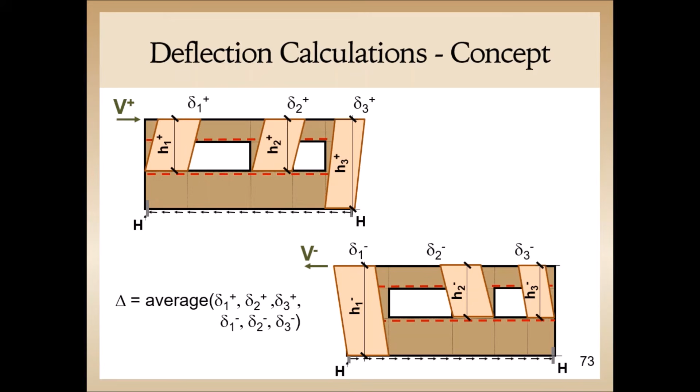Many of you likely have a deflection spreadsheet set up in your office, and this is easily automated in a spreadsheet, but it will also be part of the accompaniment of the spreadsheet that we are developing.

So in this case, we have a lot of data points to compare to our testing. What's important to note is that the results based on using that analysis technique did match the backbone curve for wall 4 as well as wall 12, where we had multiple openings and asymmetric piers, if you remember the walls I showed you earlier. Most of our analysis was done for that wall buildup 12, so our calculations and the laboratory testing matched up closely for what we determined as our deflection method.

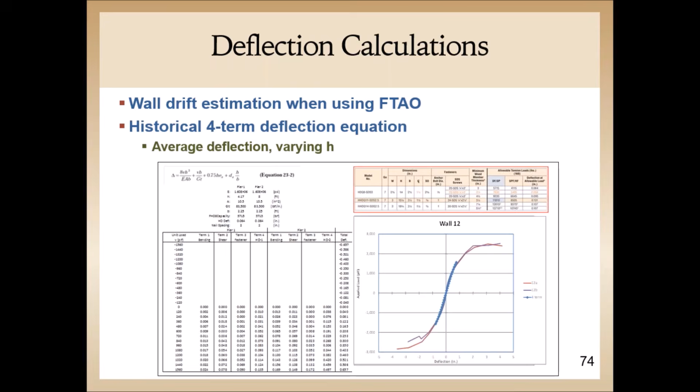This last one is a true or false. Wall sheathing can aid in force transfer around openings, tension, force, resistance. Is that true or false?

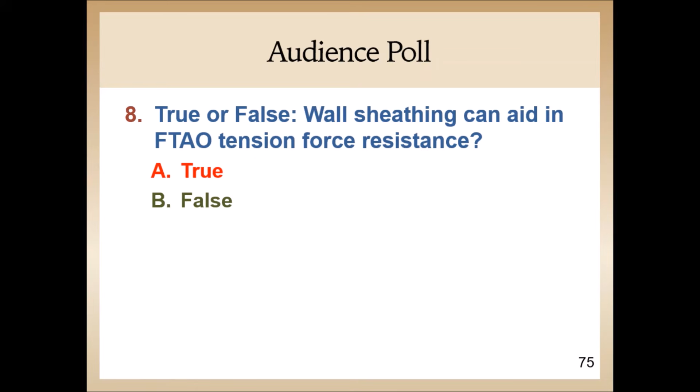So the answer is true. Wall sheathing can aid in the force transfer around opening tension force resistance, and that was proven in our laboratory testing on wall 6 that I showed you before. And in reviewing the table I showed you before, especially for the drag strut analogy technique, it did help.

Specifically for that technique in the design examples and laboratory testing. So getting to that, the C-shaped panel, as noted in our testing, did reduce the amount of strap force required if your contractor or client is focused on eliminating as much hardware as possible. This is something potentially to consider. You might look at your strap forces, and if you're calculating that, simply taking a C-shaped panel perhaps, you can eliminate some of those strap forces, which might help eliminate the strap altogether. At this time, we do not have additional engineering analysis on a calculation basis, but it is something you can develop into a rational analysis in the future.

And the question is, is that a problem? I certainly don't think it's a problem. It'll make the walls stronger in rigidity, but as we've shown in our testing, the minimum is only the hold down at each end of the wall system. So that's all you really need for force transfer around openings.

Making sure that this is all detailed correctly and designed correctly can help recover the most economical design and what's going to be the best design for safe construction.

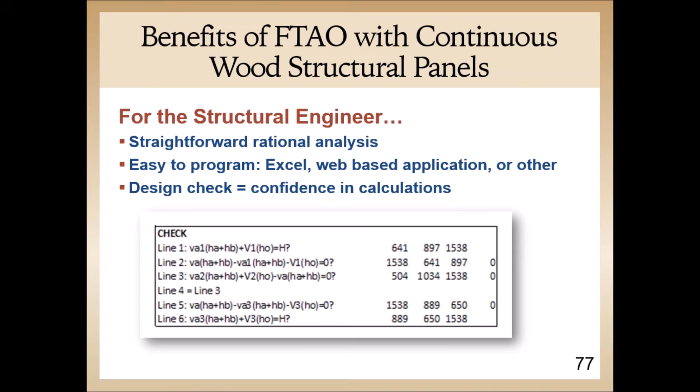So we wanted to make sure that all those forces were coming to zero at the interior.

Also, as noted, the value proposition of being able to minimize the number of hold downs and hardware on the project as a whole: looking at these walls as a larger perforated wall, you can have a single hold down at each end of the wall instead of placing multiple hold downs at each opening or each wall line. It also depends on the overturning loads. You might be able to reduce these altogether with the dead load addition from your structure, and hopefully that will help you reduce the overall hold down and hardware on the project as a whole.

Which also would mean fewer callbacks, less inspection time, less everything for the project, correct?

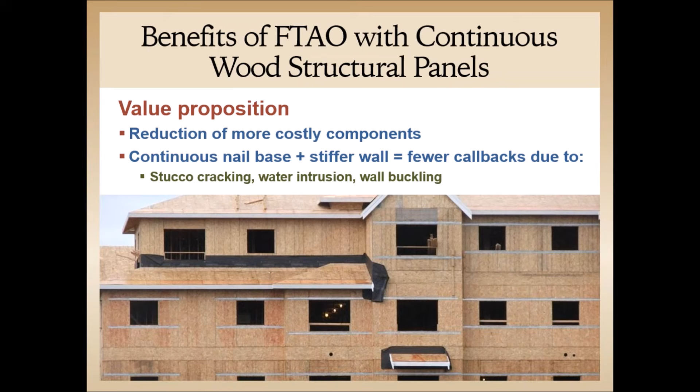So as we started, hopefully as we went through this demonstration, you were able to get through the learning objectives. We began by investigating what was going on with APA and our laboratory research. We looked at all the different ways we could use FTAO for multiple openings and asymmetric wall piers. And we looked at some of the studies in correspondence with FTAO in comparison to the other design methodologies currently being done.

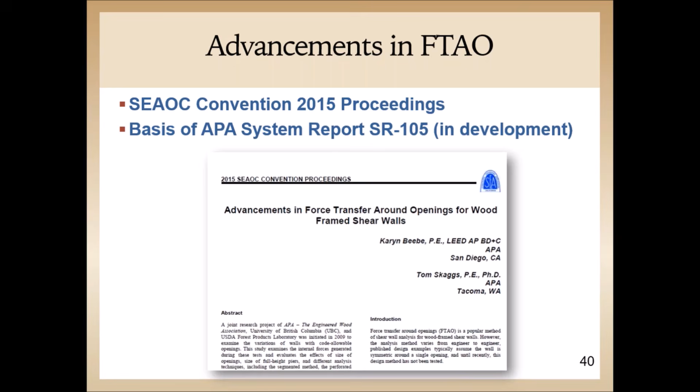Historically, it was only seismic. In the 2015 SDPWS, it was updated to accommodate both wind and seismic loading. So no matter what you're doing, design-wise, your building has to resist lateral loads, and the walls you use need to have one of the two adjustment factors applied to the wall system.

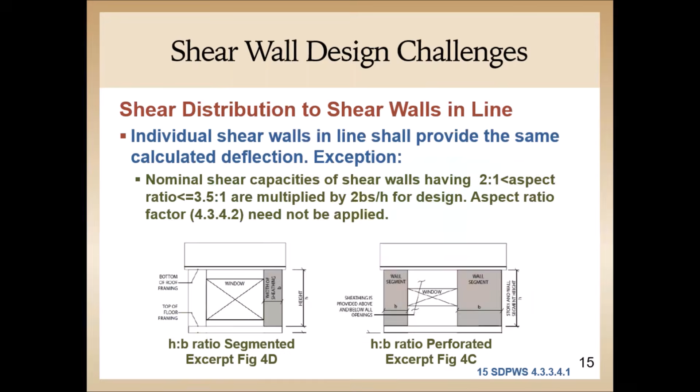There were also questions related to measuring the aspect ratio given the three different methods of shear wall analysis. Maybe on slide 10 you could show that, starting there, and just go briefly over where you measure the height and width.

Typically for a segmented wall, looking at the wall segments, the aspect ratio for the height is measured from the bottom of the sill plate to the top of the double top plate, so the full height of that wall. The width, the BS value, goes from the edge of that to the adjacent opening. If there are multiple openings, it's whatever the width of that wall pier is between those openings.

We're going to have the same value for perforated, the exact same. We're measuring height from the base of the sill plate to the top of the double top plate. Width is going to be the exact same as well.

Looking at force transfer, this is in my eyes the biggest benefit, because our height is only the rough opening height. So we're looking at the bottom of the top plate of the opening and the top of the sill of the opening, that rough opening height. And our width is going to be whatever the wall pier width is between the end of the wall and the opening, or between openings.

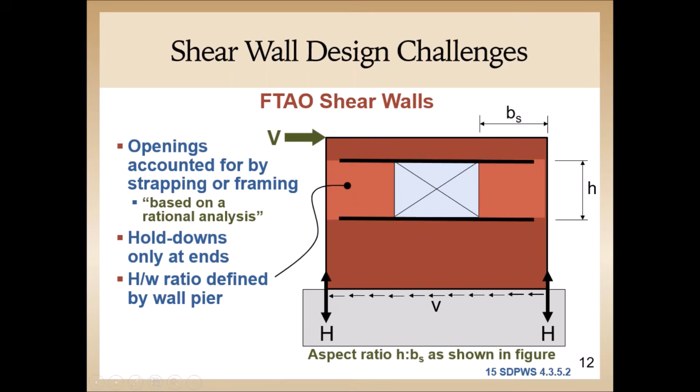For a segmented approach, if you have platform construction, say a 2-story shear wall but platform framed, do you measure the overall height from roof to foundation, or where do you measure it for that 2-story shear wall that has platform framing? You would typically measure from the top of the foundation or bottom of sill plate to the top of your double top plate.

So if we have platform or balloon framing at a tall wall or great room area where you have a 16-foot tall wall, it would essentially be the height of your stud plus the double top plate and the sill plate.

Here's another tricky one: what if you had an opening, and then one below it, two openings? What do you measure? A stacked opening? Typically if we do stacked openings, you just consider it as one opening. So if we have two 2-foot openings with 1 foot in the center, you end up with a 5-foot opening. We're still only accounting for the shear above and below the openings with that sheathing resistance.

Technically, you could probably use the values, but it was not tested. So I would just account for it with the full height and subtract out whatever sheathing is in between openings.

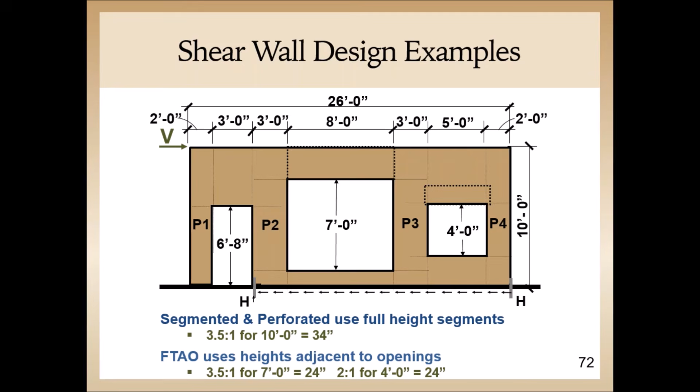Okay, so we'll have one last question—I know there are a lot more. Jared has agreed to go through some of these questions with us later and we'll follow up, but here's one last one. In the design example of the three walls—I don't know what slide number that is. Let's see, slide 71. Oh, you went right to it. Okay, you're paying attention.

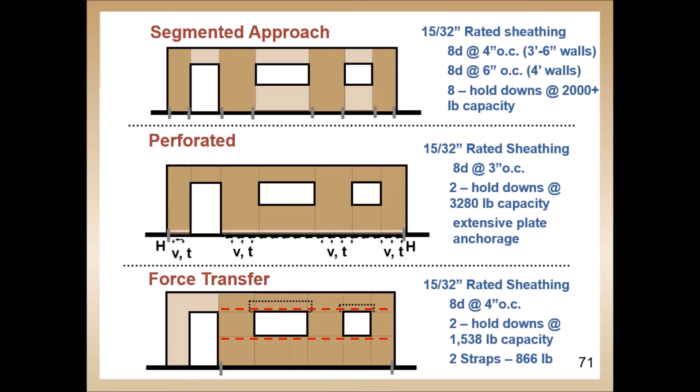On the force transfer around openings, the first pier, going from left to right—what would happen if you used that as part of your lateral system? How would the comparison be? I know this is off the top of your head, but technically, based on the methodology we studied in the Diekmann method, you cannot use the first pier because we're estimating the resistance above and below openings to use our strapping. So you can't use that very first pier because there's no way to transfer load around the bottom of the door opening if we have no sheathing resisting. That's why in the design example we moved to the pier on the opposite side of the door, because we have no way to utilize the first wall pier.